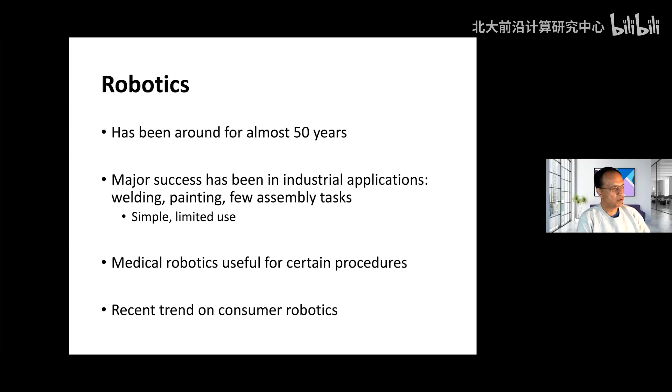So there have been robot products, but they had limited success. Robotics has been around, but till 10 years ago, there was very little success beyond some industry. Now this is a lot of exciting time. We are, at least in media, it's the same in US and maybe China. A lot of hype on AI, robotics, and autonomy. There's a lot of excitement. Perhaps hype is always higher.

When you see some robot, a couple of months ago, Tesla, which is doing really well selling cars in the US and making a lot of money, they also introduced a Tesla robot. And just two weeks ago there was a big conference, CES, showing this up.

Recently we're working on legged robots. This is the Big Dog from Boston Dynamics, working on these dogs. Those are big robots. You also see small robots, swarm robots the size of a bee, a flying bee, putting all the intelligence in a flying bee, very small. And then you see robots like on the right, like Da Vinci, which has been very successful in the hospital alongside a human, and snake robots, which can move around and be used for rescue. So there are all kinds of robots coming along.

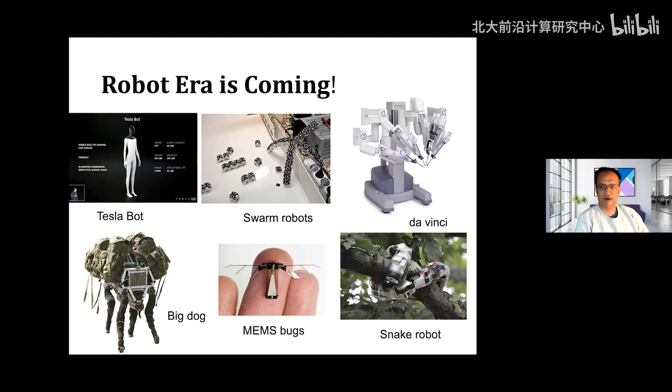Now, in the last 10 years, as AI really picked up and machine learning, computer vision started working, this has seen a huge explosion. The biggest investment, I would say, is in autonomous vehicles, and I think the biggest activity is from US and China. In the US you've got Google, Tesla. In China you have Baidu, and many other companies.

Now, of course, these companies promise a bit too much. For the last 10 years, there's been more than $16 billion invested. Baidu has deployed robot taxis, and you can see the deployment is more in China now. One of my former collaborators, Rui Gang Yang, is now CTO of a company called Inceptio. They're building trucks, level 3. So autonomous driving in certain forms, not full autonomy but semi-autonomy, partial autonomy, is coming up.

You can see that. Another big success has been logistics warehouses, especially in the US, we see orders from Amazon. I'm sure in China it's JD.com. When COVID came, nobody wanted to go to malls, so we ordered everything online. Sales went up, and they use a lot of robots for delivery inside the warehouses. I'll talk about that, warehouses to your home.

Then, of course, there's Foxconn, and you're seeing more and more social robots coming. Recently, a couple of months ago, we had a partnership with Amazon, and I'll show you the Amazon robot that's going to come out very soon.

So where do we see success? The big success in the last 10 years in robotics has actually been in warehouses. This is the Amazon warehouse video. Since rolling out the Kiva robot across its fulfillment centers, by 2018 they had 100,000 of them. By now that figure has comfortably surpassed 200,000, and Amazon Robotics has been refining the design still further.

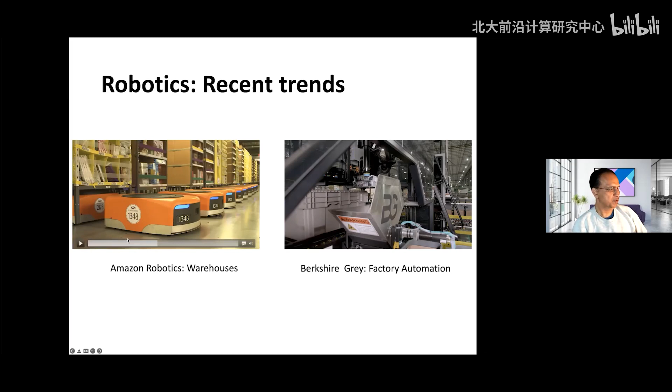The new iteration of Kiva, known as Pegasus, is 10 centimeters shorter, meaning more can be stocked on top, and it uses half the parts, so it's cheaper to manufacture and maintain. Amazon says Pegasus can lift a hefty 600 kilograms and can be customized with a conveyor belt to work in sortation centers.

So warehouses have been a big success story, but to make this work, they have to design warehouses which are very robot friendly. And again, you saw robots moving in rectilinear grids, and there were no humans.

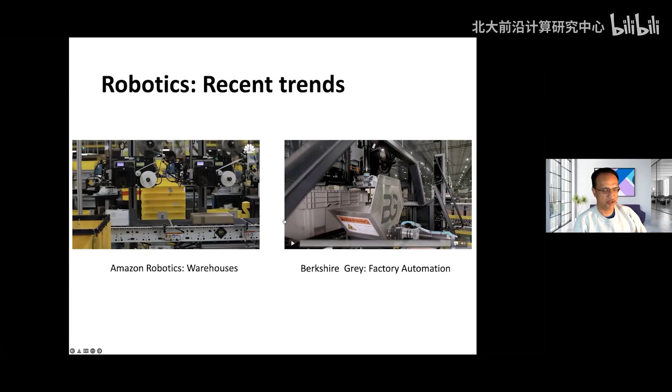The other company, where one of my good friends, Matt Mason, is involved, had an IPO last fall in New York worth $300 to $400 million. They're doing certain kinds of factory automation, and again, they're customized to be robot friendly. This has been an advantage since rolling out the Kiva robot. So this one I'll show you.

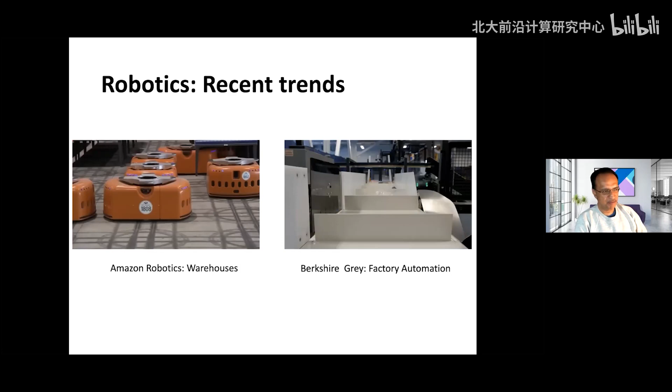So there's a lot of packaging and some simple manipulators involved. Again, this clearly makes a huge benefit in factories for packaging and moving items around.

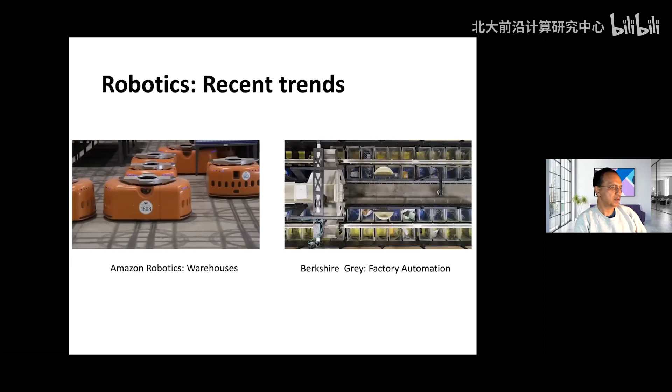So when you order something, by the time somebody delivers it to your home in a box, robots happen. These are examples of, especially at least in the US right now, a very serious labor shortage. I don't know the condition in China, but here a lot of people retire. There's been a massive resignation because of COVID, and people don't want to work. So right now there's a serious shortage of workers, and that's led to more autonomy.

We've got to do it. So this is where we have seen success of robots, but I also want to point out why these have been successful, and why in many cases they're not.

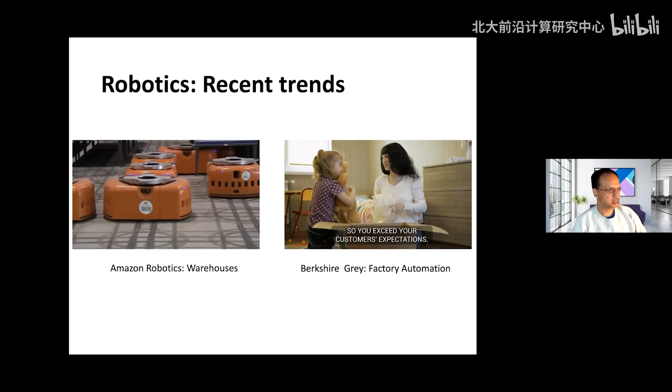As I said, these warehouses and packaging environments were made to be robot friendly. They even choose lighting where computer vision works well. There are no humans, and the techniques have been made to work around that. One big challenge for robots has been dealing with humans, because humans are the most unpredictable thing a robot has to deal with. If you ever want to make robots successful, keep them away from humans, because once humans come close to a robot, life gets challenging. They put a lot of sensors on the ground and use special lighting to make it happen.

To give you an example of what is more challenging, one of our recent projects is with Amazon, which is doing lots of things. Amazon is one of the biggest companies. Not only logistics, but there's Lab 126, which is going to introduce a robot called Astro. They just announced it last November. We are getting our first version in January. It is still not available. This is very challenging because they want to put this in your home.

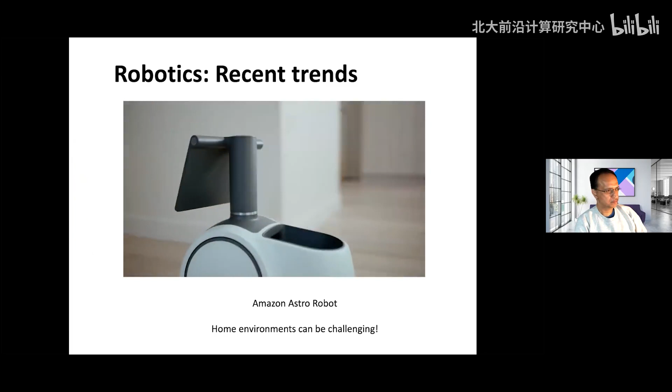A robot? Yes. What are we going to do with a robot? Well, Astro, follow me. Hi, Grandma, I miss you. I miss you too—hey, you got the toy I sent? Yeah, I love it. Astro, follow me. Cool, all right, race ya, come on.

So if you see this video, Amazon is showing a confirmation—this is a nice clean house. Now my house is not so clean; my house has too many wires and too much mess. So we still don't know. This looks nice, it can stay in a home, it can follow people around.

You can take the camera, you can remotely monitor your home. But what if you have a pet? What if you have a small baby? What if you have cables? We don't know how good these robots can deal with the mess of a real home.

Of course, these are good cases to show. There's a camera that comes out and you can see remotely. Yeah, turned it off.

And now I totally believe you—ooh, yikes. So think of the robot with a camera: you're sitting in your office with your iPhone app, doing it. So this is where things are happening, you know.

And of course, for older people, especially during COVID, people could not go home, and it was very hard for older people. Your robot can be a social companion, checking on you—like, 'Steve, remember to eat something green today, Dad.' 'Check.'

So this is clearly a trend right now. In America, we saw a lot of vacuum cleaner robots. I use them, but again, you have to make it robot friendly. And this is where they're coming out with home robots which can have cameras, which can follow you. And it has a small container, you know, you can even go and give a cup of coffee or a Coke. So this is where it's happening.

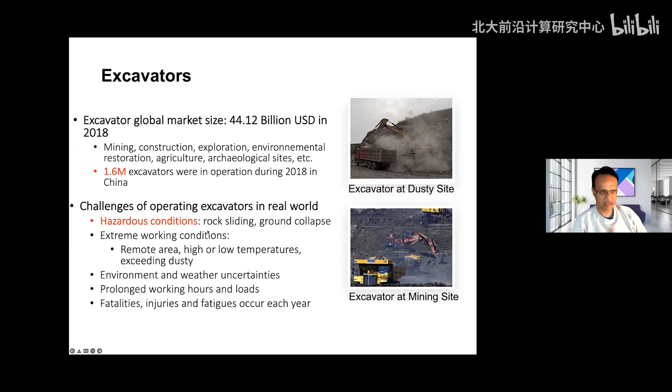Now, what are the challenges? Normally there's a human driver working in very difficult conditions. It's not labor friendly - dusty conditions, mining, rock sliding, ground collapses. You could be working in very hot or very cold conditions, bad weather. This is a very difficult place for humans to operate - hazardous and not human friendly.

So the thing that we started - there's a paper that appeared in Science Robotics this last summer, last August, and it got a lot of media attention. This is the excavator from a big company called XCMG.

We put all kinds of sensors on it - right here there's a camera, a LiDAR, the RTK sensor, the inclination sensor, the pressure sensors. So we took the excavator and fitted it with all kinds of sensors to give us perception, force feedback, pressure sensing, and computer vision. This was a lot of work, and we had to make sure they're robust, because these excavators are digging - you've got to be very sturdy, the camera can't be loose. It was a lot of challenges to get the engineering right.

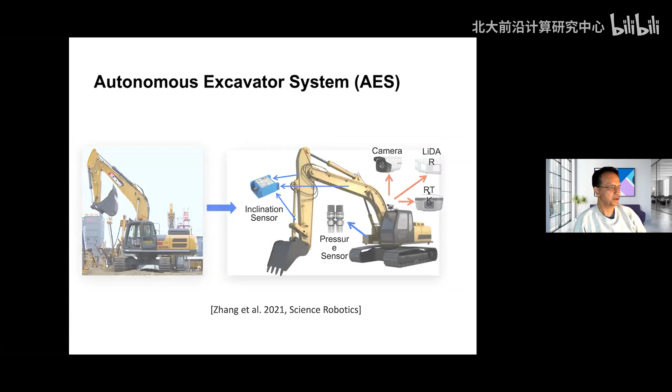We initially said, let's focus on material excavation and loading, because these are still quite challenging. So after about 2.5 years of work, with Baidu deploying a lot of resources and engineering, we reached a stage where we now have an excavation system comparable to as good as a human. Humans get tired - this doesn't get tired.

About last year, we reached a landmark where it could work 24 hours non-stop, day and night. In fact, this customer has it deployed now, and I just learned from Liangjun today they've used it for 6,000 hours. So this is real robotics on the site.

Autonomous cars go for a little bit. This is reaching a level - I'll tell you why we can do this and what we cannot do. So this is a big mark in robot construction, that we are reaching this stage. How do we do it?

So again, what do we do? As I mentioned, we put a lot of sensors - perception sensors, planning sensors. We have a big perception pipeline, high-level task planning, motion planning, and control. Even within perception, we have a LiDAR, multiple cameras, 3D parsing, 2D parsing, localization, inclination, pressure data. It's a very complex perception system.

Then there's high-level job planning - do you want an excavator for waste disposal, loading, rock removal, or trench digging? These are like 4 big tasks, and there are more tasks we can do. For each task, we come up with a series of what we call low-level planning, motion plans, and eventually you go to the actuator. So you can see this is a pretty complex system - lots of ideas, lots of effort went into putting it together like this.

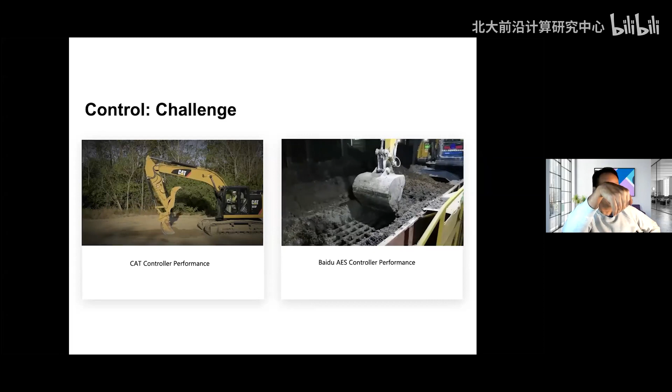This is, for example, to show you on the left a human applying this, how they open up the bucket here and do the digging. On the left is the human version with the expert, on the right is our own automatic system. See how as it moves forward, it changes the angle, showing how we do the control. It slowly changes the depth and comes close to human performance. A lot of effort went into optimizing the perception, planning, and control so we can reach human-level performance in this situation.

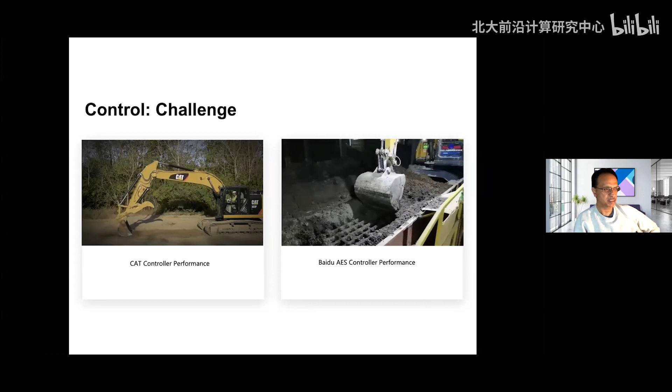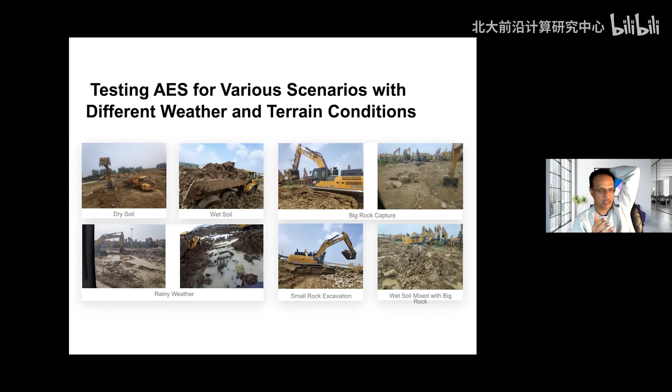We also test, as I said, conditions where when you dig, water comes up, or there's wet soil that can damage it. We had to make sure, especially if you're working 24/7 — these are not friendly conditions — that your system can work in different weather conditions and terrain operations. So this is just to show you how we did it.

We wanted to know how close we come to a human. There are three kinds of excavators we use: the smallest one is called 7.5 ton, and the very large one is about 49 to 50 tons. We did a comparison of if a human operates for 2 hours, how much excavation and loading it can do. For the small case, our efficiency is very close to an expert human. For the middle and high case, we get to 86 or 90%, because these are bigger excavators.

So in terms of control and optimizing the motion, we are still about 10 or 15% away from human efficiency, but this is running 24/7, whereas humans get tired and can make mistakes.

In fact, now what they're doing is this truck was human-driven, but now they're also deploying autonomous trucks. So they want to automate the entire mining, digging, loading, and transfer of the material. That's what's coming up there.

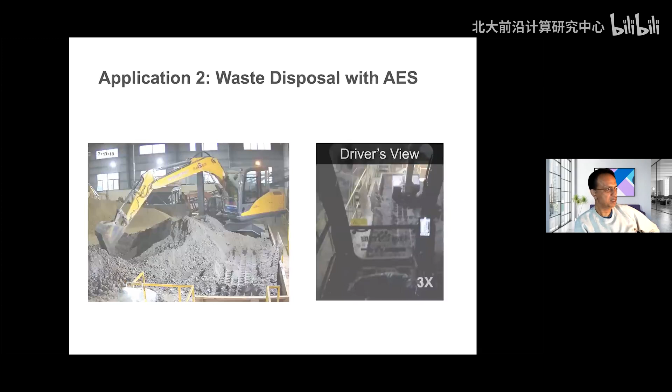This is a waste disposal application we were doing here. This was showing — we basically ran for 24 hours of video recording, and you'll see it at 3 times speed.

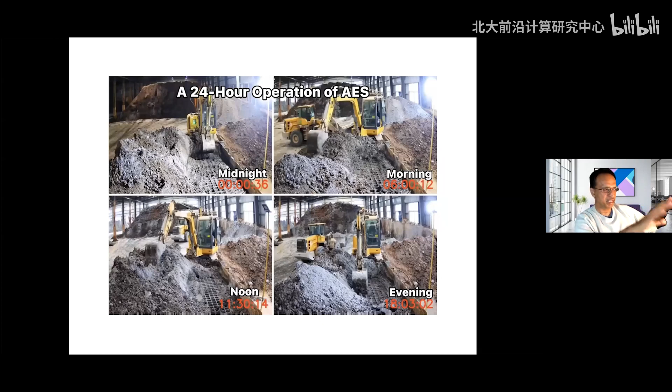So we really want to show the videos, the sunlight condition changes, and you will see the sand moves because you're digging from here to here. This was to really demonstrate that in these settings, it can work well.

So there are a lot of lessons to be learned from here. This was an application, and I'll say one of the reasons we have had success. I'll tell you what works and what doesn't work. These excavators operate in isolation.

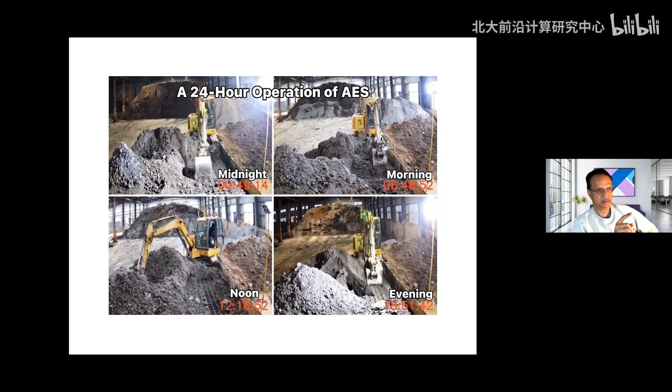Remember I told you a few minutes ago, there were no human operators nearby. So the fact there were no humans - literally I say, thank God, I won't hit anybody, because I don't trust autonomous systems.

Is it a question? No, not really, probably someone didn't turn off the mic. Okay, all right, but any question, ask me.

So the good reason why we're able to make it work - we're dealing with an outdoor scene, a lot of terrain materials. So we could take the thing, get all the labeled data, make the pipeline for the excavator. They were like 4 or 6 level, high level task planning, digging, moving things. We could come up with the algorithm for that.

So we could automate the perception pipeline for outdoor terrain, and control. Because those modules were understood, we could develop those solutions for specific applications - combine learning, planning, and vision - and there were no humans. So part of the reason we succeeded is because of these factors.

Last but not least, excavation is more like digging and pouring around - this is not fine manipulation. If I give you a robot task, let's say putting your shirt on and doing the button, when you put the button like this, that's very fine manipulation. That's where robots struggle - they cannot do fine manipulation.

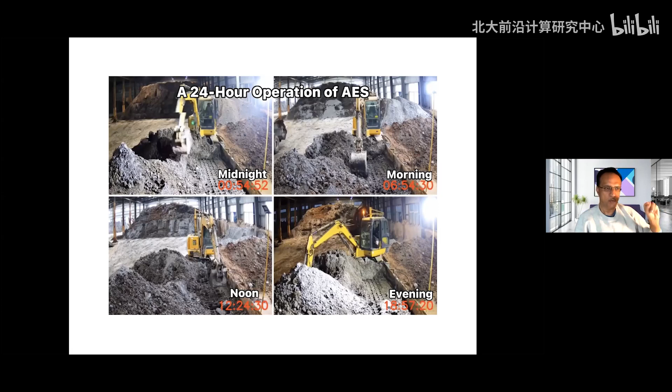So these are lessons to be learned - what is doable and what is not doable. One has to be honest about what is doable. So that was the first environment.

The second thing - we did a lot of work on navigation, indoor and outdoor scenes. This is where I have a lot of projects going on, work I started with Japan and Hong Kong. As I said, we see a lot of robots operating - even now you'll see some demos, a robot delivering food on a college campus, a robot in the airport. But whenever you see these commercial videos, these robots are working in empty space.

Remember I showed you Amazon Scout - the challenge is, can this robot operate in a dense crowd? Of course, there haven't been many crowds because of COVID, but this is our building. So we took a robot and asked, can we make this robot handle a dense crowd?

So what we did was - this is a turtlebot. There's a LiDAR here, a depth camera, and a laptop with some clumsy tape around it. Why? Because we're using the sensors from these cameras and LiDARs, and this laptop is my GPU running deep reinforcement learning. So we built the system with sensors, but there was this GPU in the laptop - imagine I just pulled the laptop on top of this thing.

But now industry is coming with very strong AI chips, so will this come up? This is what we do - our goal was, can we develop perception and planning technology so that this robot can move through a crowd just like humans do?

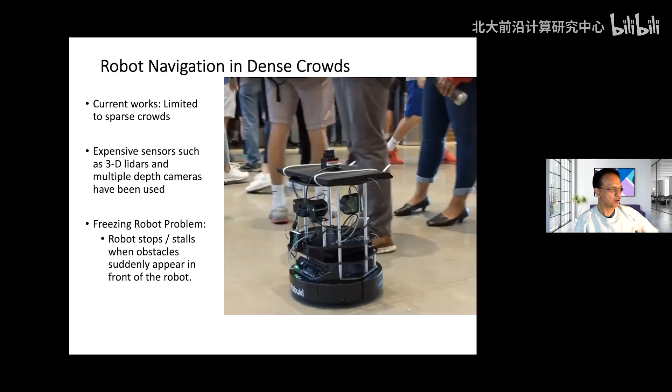That's what the real goal was. So as I said, we developed a whole system called trajectory prediction for advanced DRL. DRL is reinforcement learning, collision avoidance policy.

It takes as input the LiDAR—it's an indoor LiDAR, of course they're getting cheaper—and a depth camera, RGBD. We have some goal location, where to go, and from this you compute a robot motion. So what you train is basically a deep reinforcement learning called collision avoidance policy.

The goal here was, how can we design a smart policy which can deal with a dense crowd? Because when you're in a crowd, it is very hard to predict how a bunch of humans work. And humans can sometimes be mean—I'll show this to you, coming up here.

So we started with a lot of components. There's been a lot of work on pedestrian tracking. There's a very popular tracker, YOLO, we use that. So we look at all the pedestrians and predict that this person in 2 seconds is going to be here based on speed, this person will be here. We predict where this person is going—even as humans walk, in our mind we silently predict where the position is going to be. So you do the tracking, but you also do prediction of where they're going to be.

And this prediction is used for the reinforcement learning policy. So how does this work? Let me show you the video here. This is a system we published a couple of years ago, and I'll explain what's going on. A lot of effort went into this, and I'll show you the simulation we used to do it.

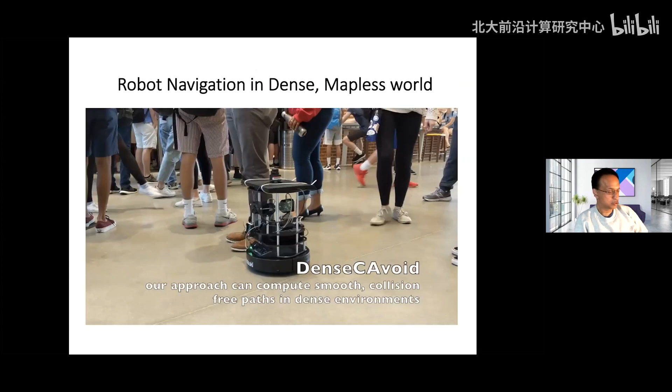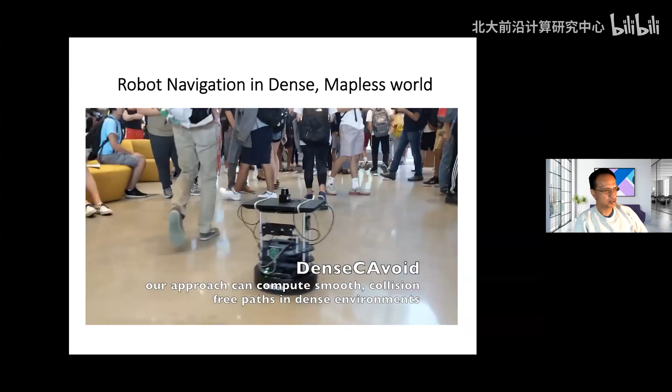So this is our robot. This is a computer science building, a new building at Maryland a couple of years ago. You can see it's moving, and some people are mean—they put their foot out at the last minute and the robot needs to avoid it. This is totally uncontrolled, you know how students are on a campus. This is before COVID, and the robot is navigating among the people. This is real-time video from 2 years ago.

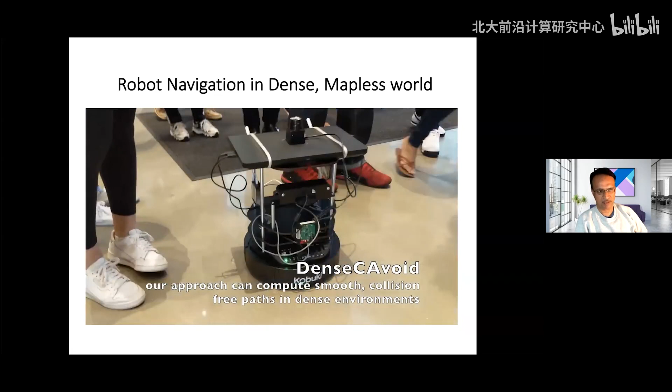The good thing here was the robot was flat, the ground was flat, but it had to deal with lots of human components—tracking and prediction—and you have to take all these components and make them work together. So this is showing the pedestrian tracking. Tracking is pretty mature, there are a lot of trackers available. We use YOLO 3, and I'm sure there are more trackers coming around like that.

This is a mapless world—you go to a place, the robot doesn't have a global map, unlike Google vehicles and how we do things there. Let me speed up the video in terms of time so you can see how the tracking works.

The second thing was, so how do you train it? I had done a lot of work on simulating crowds and human behavior, so we actually built a simulator. This is where, as me and Baoquan talked about metaverse and VR—this is a simulation environment. This whole policy was trained using simulation, what's called sim-to-real. We look at sensor simulation, we look at different kinds of movements, and train the robot with different kinds of human motion. So we train in our simulator and based on the policy, go to real. The more accurate your simulator is, the better your runtime behavior would be.

We also simulate things like the depth camera's field of view. Sometimes a human comes in front of you—how do you go around them? So this is how we train the robot for different scenarios, especially so it doesn't oscillate, since sometimes humans can be mean and the robot has to go around them. This is where all the simulation work we do in graphics and VR became very useful for training these kinds of systems. In fact, a lot of people nowadays use game engines like Unity and Unreal to do these kinds of great simulations. So more simulation, and whatever more metaverse comes up, that will affect robots too.

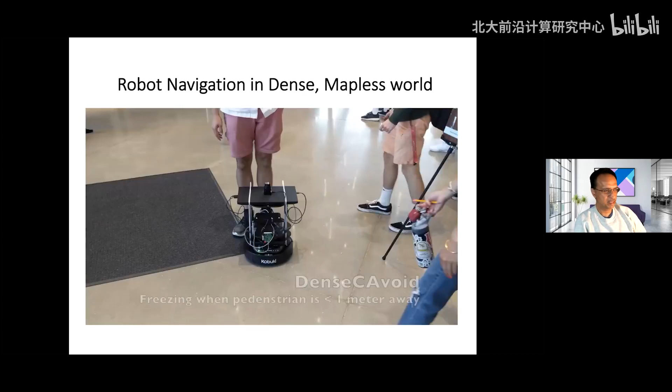This deals with a problem called the freezing robot—if a human comes in front of a robot, it will freeze. Imagine someone being mean and suddenly standing in front of the robot—this was a really nasty case, all of a sudden. But if you can anticipate it, the robot can go around it.

So this is walking in real time. And unless you're really mean, you do it.

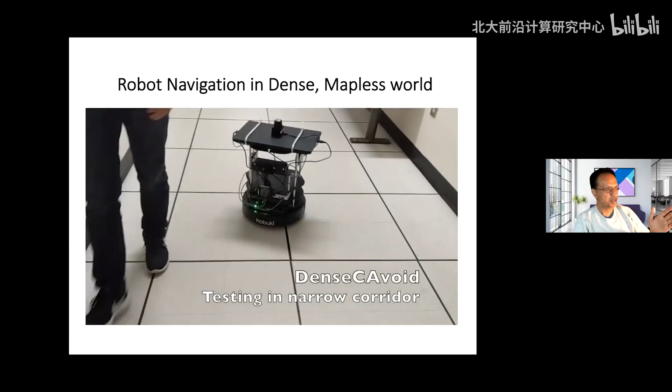But we also test in difficult situations like a corridor. Suppose the T-junction, you see a situation like this, robot is going, and it's a very narrow corridor. You cannot see in the front as it'll go. And if somebody comes around, it goes around it. So the reason we could do all this is because we were able to simulate it. As the simulation capability improves, this will get better.

Now, more recently, we have been doing a lot of other tests like bartender. So we have been deploying this robot at social events. There was a big opening of an event, our governor came, and this is a robot in a real crowd, going around handing out COVID sanitizers and chocolates.

So you have a robot going to the people, and people of course play with it. You can see my student do something with it, and it's literally serving you items like giving you water or giving you food. Or something like this, this is covered in the media here. The robot comes to you with water.

And if you don't have a mask, like some people in the cafeteria don't wear masks, this robot can take a mask to them. So you can do computer vision, detect people who don't have a mask, and the robot comes to you and offers you a mask. So this is, please have some water, or please use a mask.

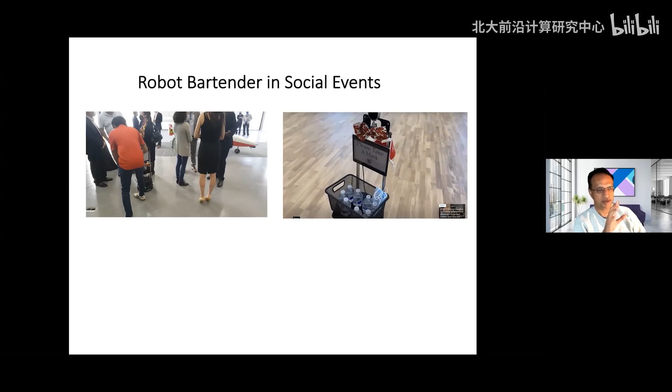So now we have technology where robots can work in indoor crowds and do delivery of items. We're at least getting close to that. This is where a combination of simulation, computer vision, perception, and planning come together. The good thing is this robot is small and moves slowly, so it's not like an excavator or a vehicle, it will not do damage. So again, I'm happy because the potential damage is limited.

And more recently, when COVID came, we developed a robot walking around. I did some work indoor at UMD, and with my student Japin outdoor. Japin's team had a dog robot that also got covered. This was in the media, in fact CNN wanted to come and film it because COVID cases were high.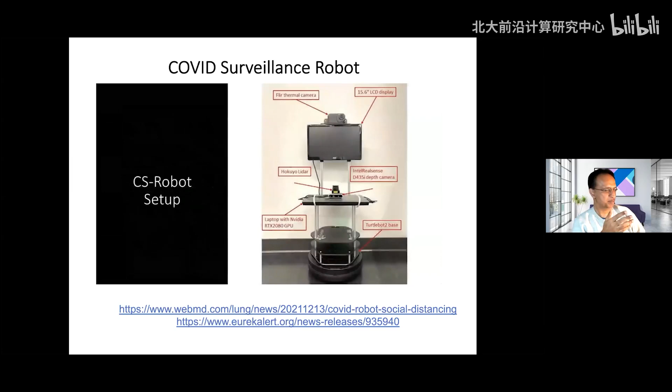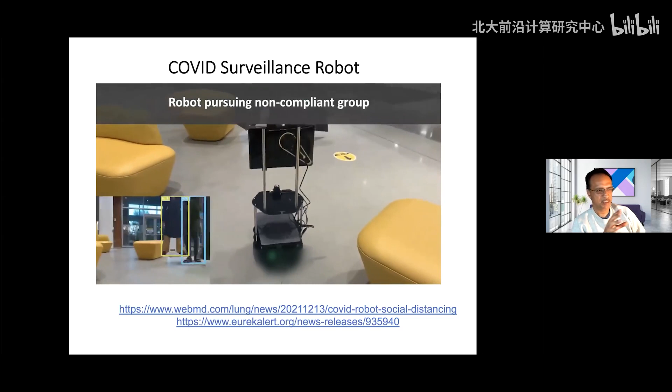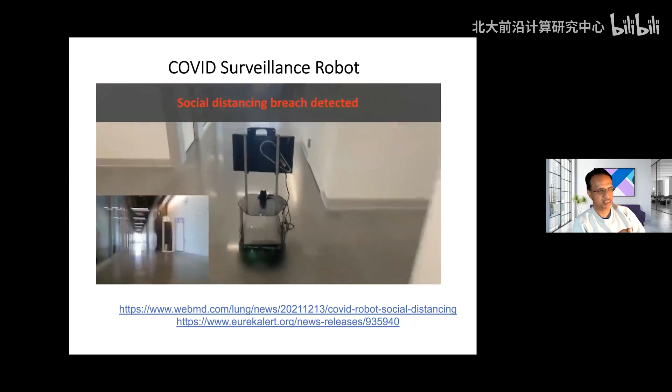So basically the idea of the robot is it walks around and sees when people are not maintaining social distance. Of course now masks have come up, but initially when we needed to keep social distance of 2 meters, it would look at people around you, and if you don't maintain social distance, it would tell people to move, like warning you're not being good, or you're not wearing a mask. So we have the robot technology now.

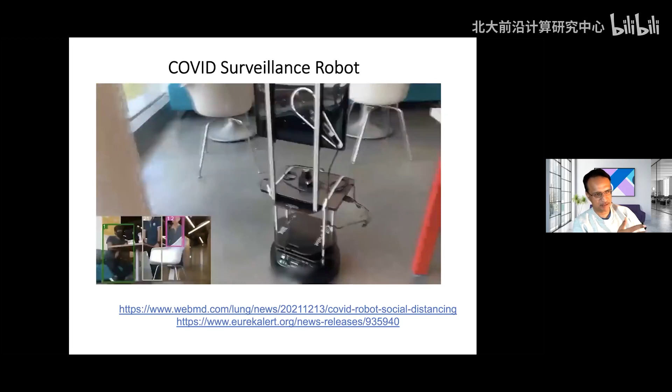This is working in our offices. You can see the furniture, there are people, it can deliver stuff to you while maintaining social distance. So this is where we are making advancement. You have good indoor navigation capabilities, you can use it for delivery, and you can use it for social distancing.

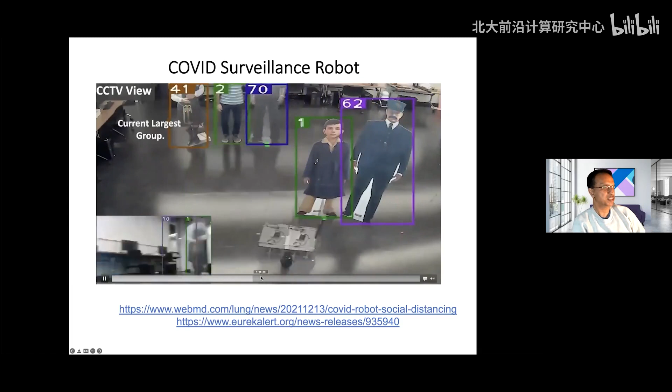So for different applications, like in our lab, we were doing experiments, but we could not use real people because of COVID protocol. We just put up this cardboard human, but we can do a pretty good job of detecting social distancing.

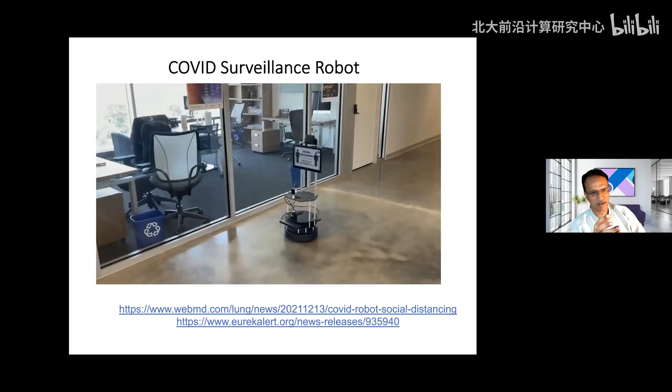One thing that came up, I'm very interested in, because pandemics keep coming, you could deploy these robots in public places. Of course, privacy issues come up. Could you see signs that people are sick, or detect viruses? So the robots can also be used as mobile sensing devices in the future, doing things like this.

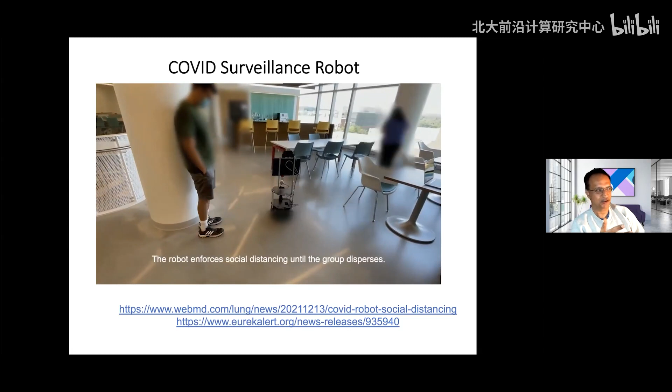So this is where when robots can move in crowds, they can do sensing, they can do delivery, there are a lot of possibilities there. So that's something we're doing.

So this robot is not very powerful. How can it go up the hill? If you take a wrong path, it'll get stuck. So how do you look at the elevation of a hill?

Robot can work in complex outdoor crowds and uneven terrain. I think uneven terrain is even a harder problem than crowds, because of the unevenness of terrain—sometimes the robot cannot go up, and it could be slippery, it could be a rainy day. So there are a lot of challenges still that we're working on here.

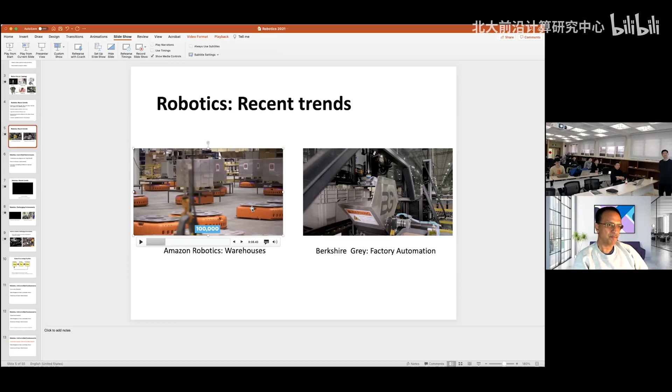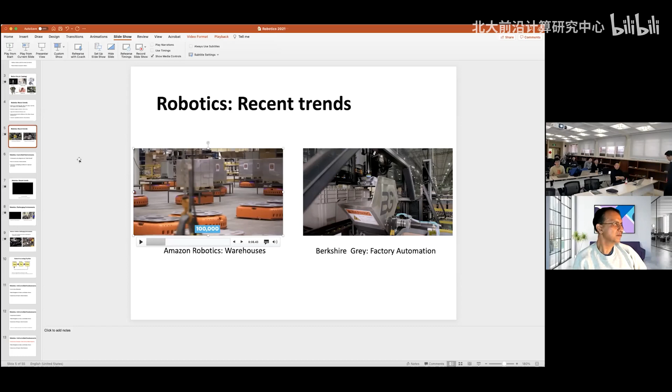I see, it's quite challenging it sounds like. But I think there are a lot of research works going on. Absolutely, yeah, Tesla is also building this humanoid robot. I feel like a lot of people are looking into dexterous manipulation, dexterous hands.

Yeah, there will be a lot of interesting topics to further the research. This hand manipulation is a classic problem—every time you go to a robotics conference you'll see 50, 100 papers on it. Certain problems are just harder, with planning and moving. Computer vision was very difficult 10 years ago, but deep learning made it easier. Maybe somebody will come up with something for manipulation—maybe in 5 years someone will have a smart idea that becomes mature. I'm just saying as of now, it's hard.

People are working on it, but just like computer vision was changed by deep learning, deep reinforcement learning handling some planning tasks—somebody may figure out how to do manipulation with a different kind of learning, and that can happen anytime. But this is where a lot of challenges lie today. That's why you see Astro—they built a robot that can move with a camera, but it has no hands, because there's no practical solution Amazon can deploy right now.

I see, so a lot of problems there. Maybe you guys can solve it. I'm not trying to be negative—I'm saying here's a potential. If you could even come up with a good, partially good solution, it has huge research and commercial impact—billions of dollars, it's a huge market for Amazon.

This is good news from the industry side and can shed light on what topic we should do for research. One of the things we're looking at is robot construction. Excavation alone is a $400 billion market, and construction is a $10 trillion worldwide market. Even if you can robotize just 10% of construction tasks, you're talking about a $1 trillion market. There are a lot of jobs in construction—see what jobs you can do, because there are lots of jobs you cannot do. So we found excavation, we said we could do this. Identify the problems which are doable and then solve them.

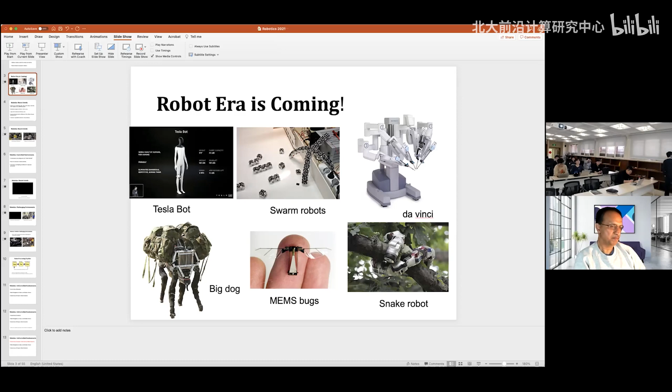For example, for the autonomous excavator, there is a complicated system combining perception, planning, and execution. From your talk, I think the whole system is split into many parts, from image processing to simulation or something like that. But do we need some integrated effort to make the whole system work? Do you need end-to-end refinement, or do you just add all the parts together?

That's a very good question, I don't have an easy answer. This was a high-level pipeline I showed—you can see my slides. This solution that we've come up with was customized for excavation tasks. We had to develop these modules and integrate them for this application and test them. But this is a great question, because there's a lot of research in perception, a lot of research in planning and control, but not much formal research in combining them and making them robust. This is an area where a lot of work still needs to be done.

So right now, we did it for excavation. The car companies are doing it for autonomous driving, they're looking at those applications. So those exist. But in general, how do you build robust systems? Because the challenge is there's some error in perception, or planning, or control. They all get exaggerated across the three or four modules, like Amdahl's law. One of them fails, the whole system fails. So we have to make each part robust and the interface robust.